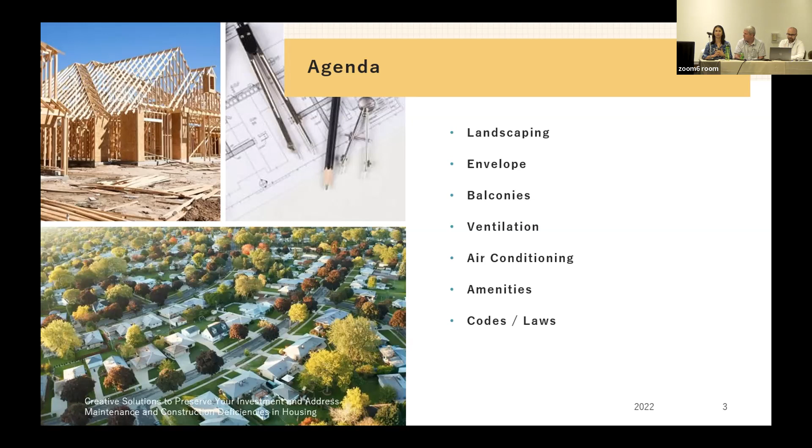As we move through these slides, I'd actually prefer for it to be more interactive. So the first slide will be some images, and then if there's anybody in the room that has an idea of what we're trying to communicate—a possible deficiency or something that needs to be corrected—we'll discuss it.

Before we dig into that, I'd like to get a sense of who is in the room. By a raise of hands, if there's anybody managing properties or development, we have a few of those. Are there any other architects in the room? Got a few. Anyone with a construction or maintenance background? Great. Anybody that wants to say who they are that I didn't mention? Okay, all right, so let's dig in.

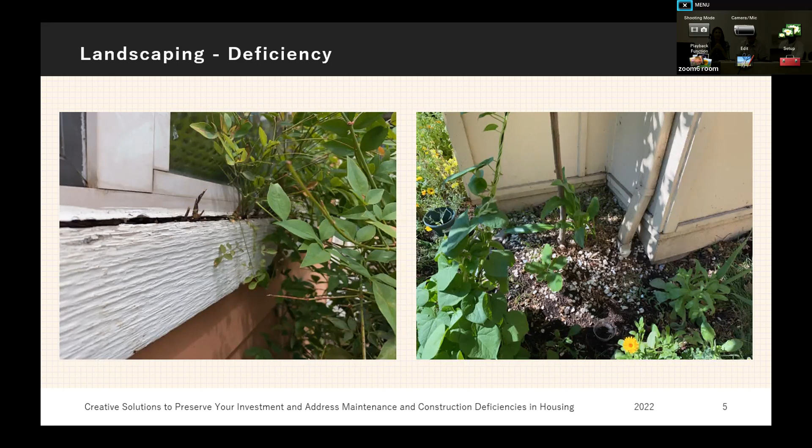Then the image on the right side—this is pretty common, and I feel like even some of us are probably guilty of this at our homes—where over time you want to replenish your topsoil or bark dust, so you're adding it layer by layer. There's some wood trim down there and the dirt is piled up against it. As we all know, we want to create a separation—6 to 8 inches is where you actually want to be. So there's moisture that can wick up into that siding and start to create dry rot. But the other thing is you're also providing a pathway for bugs, wood destroying organisms.

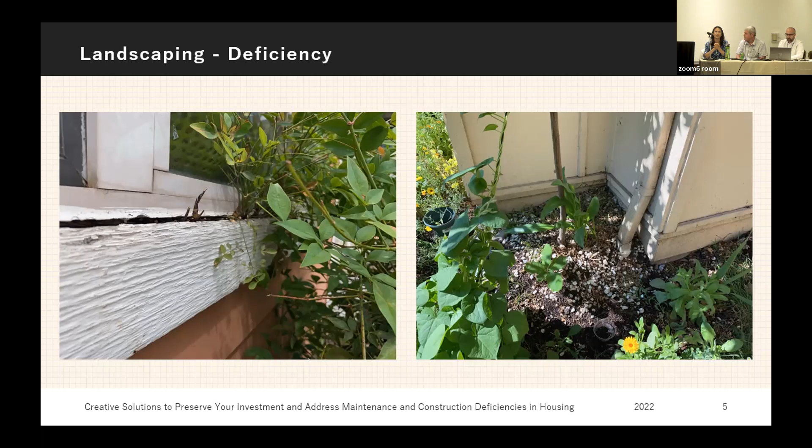So if we go to the next slide, some ideas: your baseline is to pick plants that are not going to be vine-like, keep them 3 feet away from the building, create a large separation, know what they're going to get to when they're full size, and maybe lean towards something more like wild grasses or things that stay a little more compact. So those are some of the design side—the most cost effective, just creating that separation and being mindful about what you're planting in the first place.

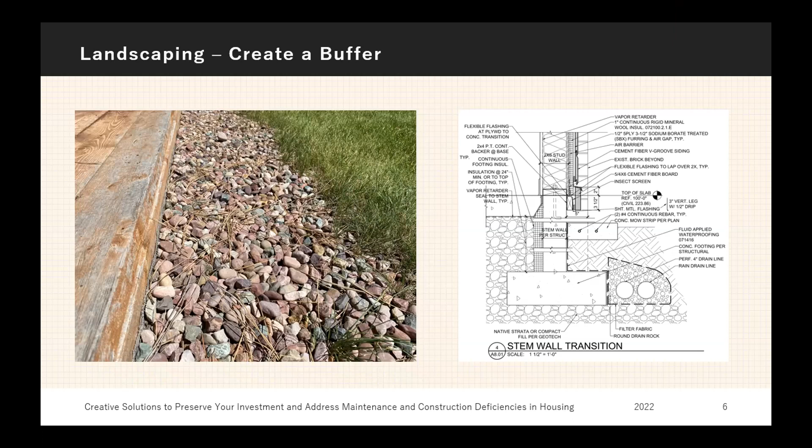However, if you want to take it a step further, some things I've seen is actually using rocks as a border. You can pick ones that drain well, so it'll also help moisture get down if you have a footing drain—that can help get moisture away from your foundations. I know some people might be concerned with the throwing of rocks or giving people the ability to do that, so maybe err on something smaller scale.

Another thing is the drawing on the right. I don't know if everyone's familiar with architectural drawings, but this is a section detail through the foundation. On this project, on the right side there's a concrete mow strip, about 12 inches wide. In areas where you might be right adjacent to lawn, and sometimes we'll see in high traffic areas the siding at the bottom getting damaged just from a lawnmower, you can create a physical separation—a physical barrier that sets the landscaping off of the building.

So that's going to cost a little bit more money on the front end, but if you're not having to follow up and constantly replace trim over time, I think you're going to capture those savings. And again, if you can't do it around the whole structure because of funding, maybe you just put it in the areas where it's going to be the most helpful and prevent damage.

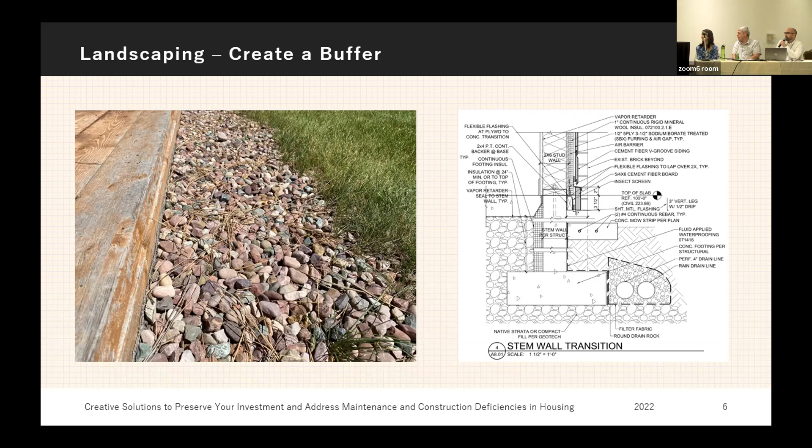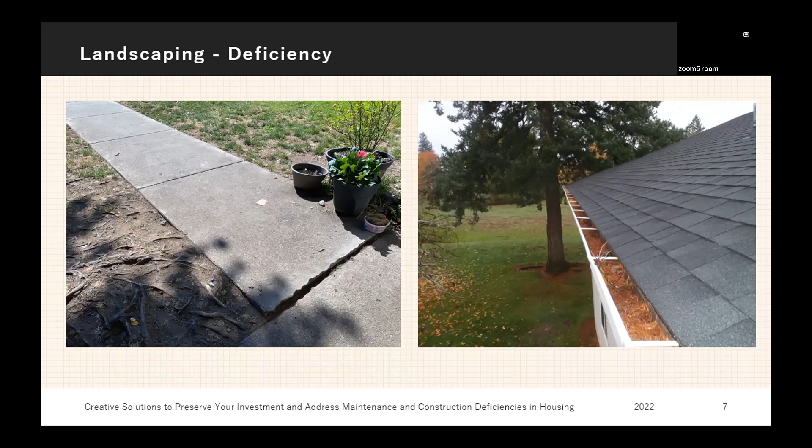What do you see in the right-hand photo? Go for it, somebody. Yeah, so oftentimes you may put an evergreen in and you think, well, that's not going to drop its leaves. Well, they drop their needles and they blow.

So the solutions here that we like to see is proximity. Trees grow, they get bigger, right? Keeping it away from hardscapes. People are typically pretty good about thinking about hardscapes, sidewalks, and keeping the trees away, but oftentimes the structures themselves get forgotten about. Where's the predominant wind coming from? Keeping it away from the buildings. Maintenance is always one of those things you try to strive for, that zero maintenance building, and that doesn't exist.

So the other thing we can also implement is root barriers, and we recommend you do that always. If you're ever near a hardscape or structures, get root barriers in. That forces the roots down as opposed to out. It actually makes it for a healthier tree anyway too. It's going to be more drought resistant, but it's going to keep those roots from going over to the sidewalk panels.

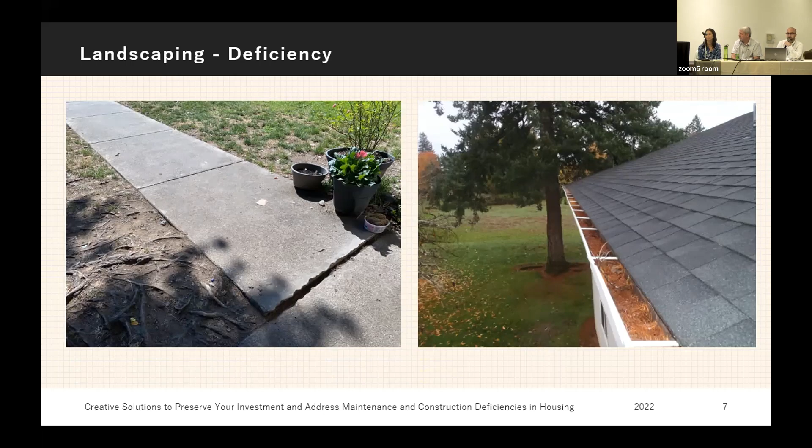Once you start to have those sidewalk panels be impacted, there's really not much you can do. You're going to get an arborist out, you're going to cut some roots if they allow you to. You're going to be now into jurisdictional issues, as trees are very sensitive in our region. And so it's going to be something that is going to be an ongoing maintenance issue.

So the best defense is to really be thoughtful about where you place that tree and be implementing root barriers when you originally plant those trees.

Maintain the water. The roots go to the water. If you're watering the other side of it, the roots will follow it. They do have better irrigation systems now that will integrate water down to the bottom of the root ball, which is something that's really nice that they've been putting into projects now.

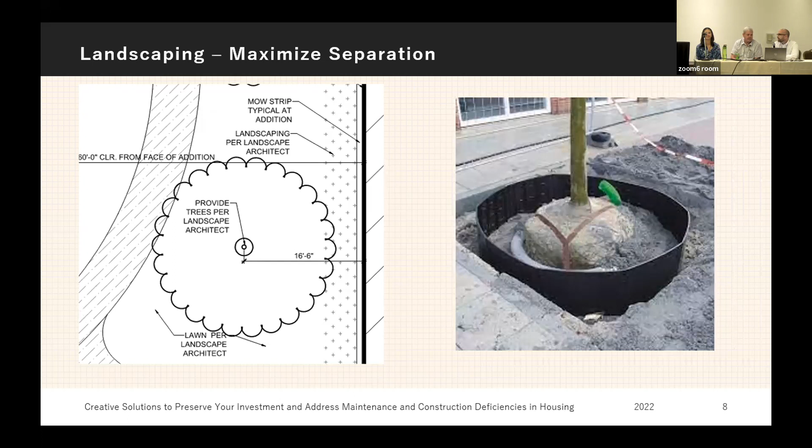Envelopes. All right, this one's probably on the trickier side to identify what I'm after. Does anybody have any ideas? Okay, oh yeah. So this one could have improved ventilation. Yeah, that's a good thought.

It might be as well.

It's especially noticeable if you see a single story structure that has big eaves, and the windows end up tucked up high under it. So you're really minimizing the chance, because openings are where we see a lot of the water intrusion and where moisture is actually getting into the sheathing and damaging behind the siding.

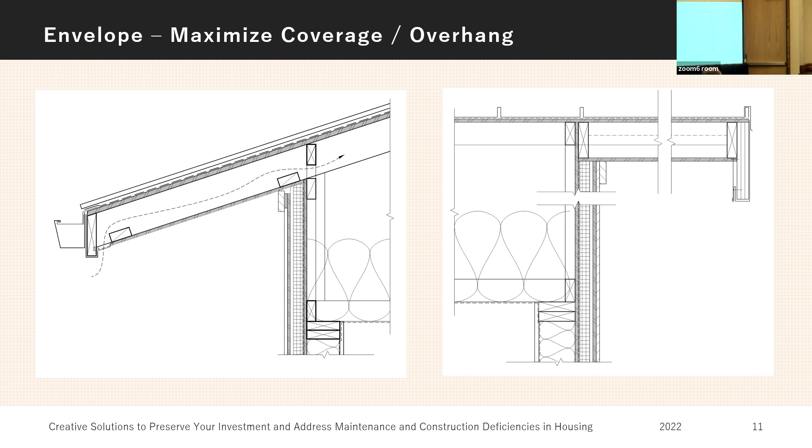I also want to comment that if you have a building without an eave, your envelope is in a significantly different environment than one that has an eave. Just a 4-inch eave builds a pressure zone against your siding when the wind blows, so that the rain doesn't push on it and flow in very weird ways. So eaves are really important, even if they're just small.

Indeed. So we gave you a hard one, or obscure. I think everybody in the room would be able to tell what we don't like here. Anybody? Yes.

Pesky comms contractors. You get done building a beautiful building, you VE'd out coax to the units, you VE'd all that stuff out, and guess what? People need entertainment, they need TV, and they start posting satellite dishes all over your building, and many different comms come in. We don't like penetrations, right? We work hard on window penetrations and door penetrations and all types of penetrations, and then somebody comes in and puts hundreds of small penetrations and says, 'Don't worry, I put silicone on it.'

Well, that creates issues, and water will find a way in. What we often try to recommend is, one, don't allow satellites. But if you do, get them posted off the building. Don't penetrate your envelope, that is your first line of defense. You don't want to be penetrating your envelope. There's also specialty pieces that can be used on your roof that integrate into your roofing system to minimize that. But if there's anybody in the room from a maintenance perspective, this is probably one of your biggest ires.

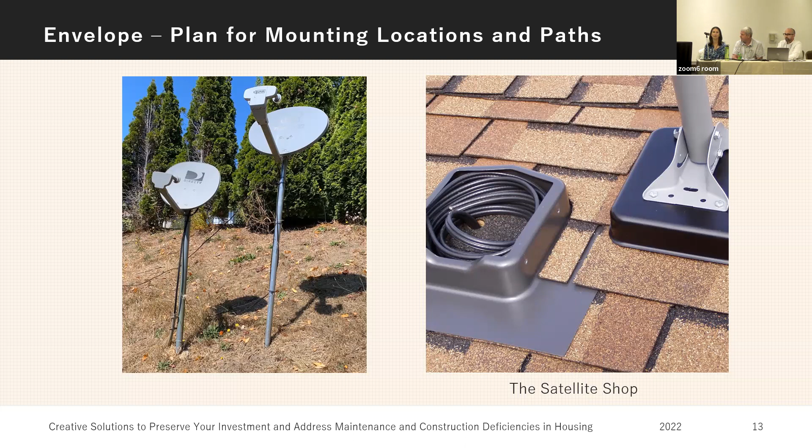So for this one, I think part of what's happening is that exterior envelope, the way we're building walls now, we're adding that air gap. On this facade, we figured out from looking below that there was a gap in the wall, and they assumed they could bolt straight through into something solid, some sheathing, but they just damaged the siding. The siding's warping. You can see that on the image to the right, and on the image to the left, there's a pretty big gap where the siding's coming through.

If you go to the next image, taking a section through, at a minimum you need to be installing some sort of blocking or backing. You also need to add additional protections above, so flashings that direct the water from your wall assembly out, and then some sort of siding or protection in front of the blocking.

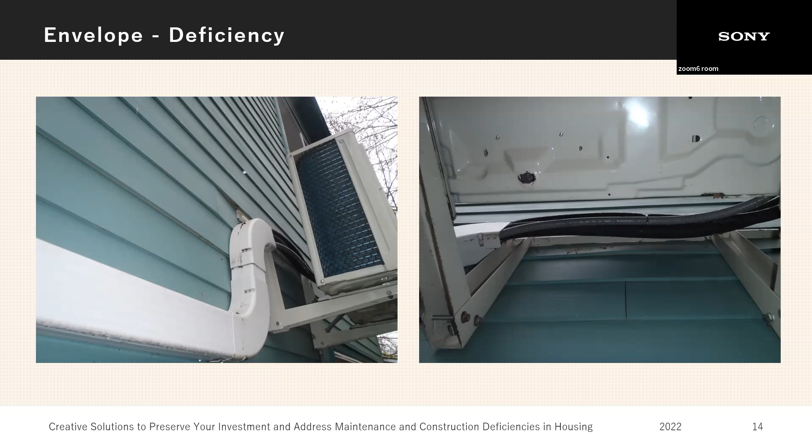So one of my recommendations is you might be getting funding for something like installing mini splits on your property. Sometimes a company comes in and you don't have a general contractor or an architect on board, and they're like, yeah, we can do it. What you really need to make sure you understand is how your building system, your envelope, works. It may cost a little more to get expert advice on the front end, but it's going to save you potentially in the long run from someone who wasn't aware of how the building was put together.

And on that particular property, different elevations had been replaced over time, so it wasn't consistent on every building. Some of the buildings were actually better off. Having someone come in who understands how to keep moisture out and can help you through that process is what I would recommend.

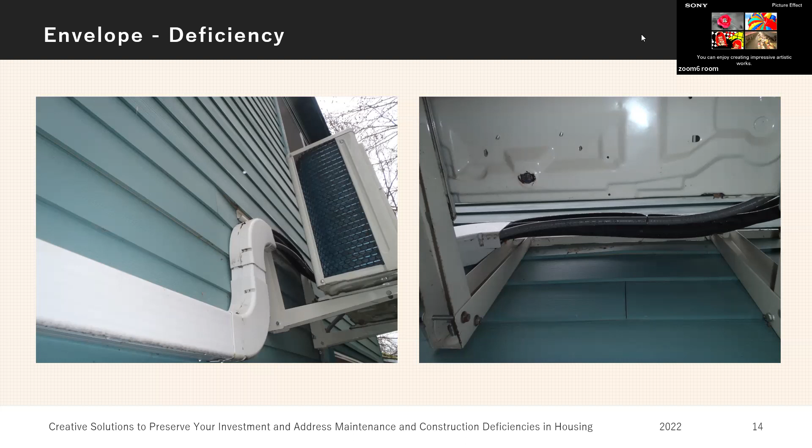I want to ask a question.

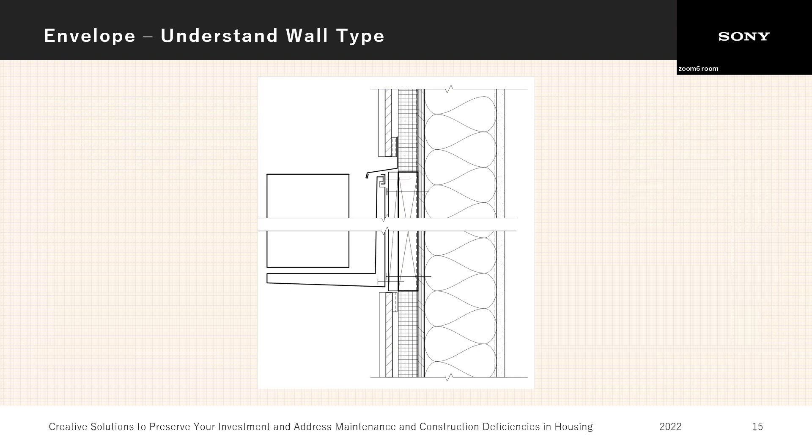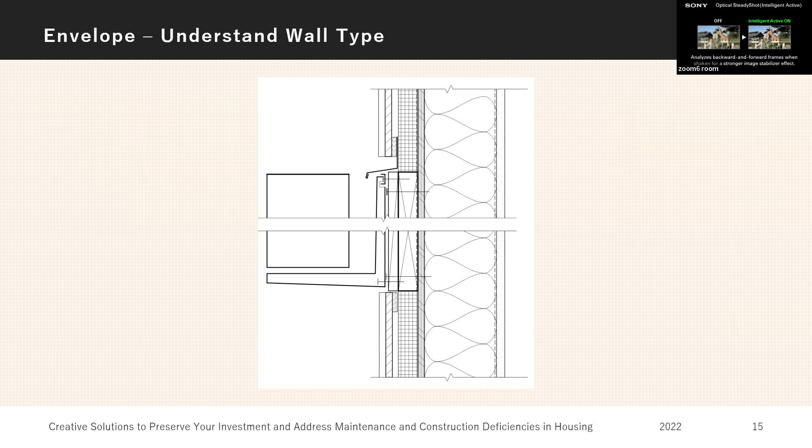I know in the past Oregon Housing has managed a lot of the energy funding, and there's been some issues with the local energy trust. That's probably what happened here - the county came in and added these systems for the tenants outside of Oregon Housing, and so it got disconnected from that. Who's really doing the energy money now? Is it coming from Oregon Housing?

Yeah, so it's still kind of an open game, and you guys are kind of fed to the wolves on whether the person is actually familiar with the housing side.

All right, so more deficiencies. Probably pretty easy judging off what we saw on the previous slides, but anybody have ideas here? Just more of the same - penetrations, right?

So you have things that seem simple and innocuous, like fire extinguisher cabinets. You're coming back, the project's over, or you get an inspection and they say, hey, we need to add some fire extinguishers, let's get this put in. But it's penetrations, and we don't like penetrations.

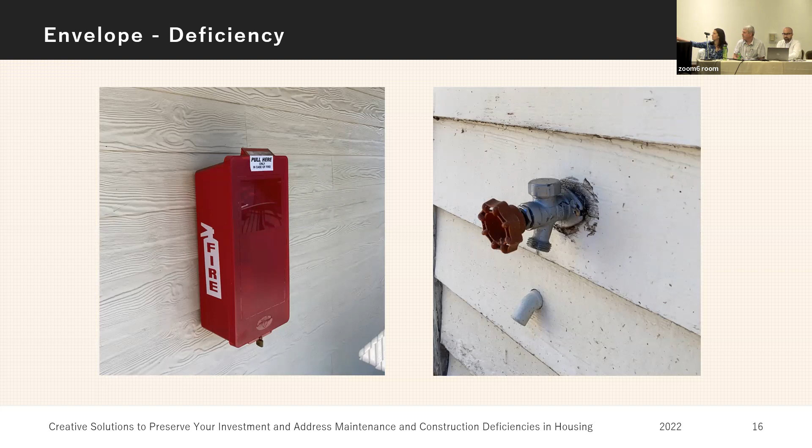And then, real quick, the image on the right is actually a hose bibb detail with more of the common envelope - now we're starting to put rigid insulation on the outside, so there's more thickness there. Being thoughtful about adding trim and flashings, making sure the moisture coming down the wall is getting moved to the outside, not just swapping out that hose bibb and relying on sealant.

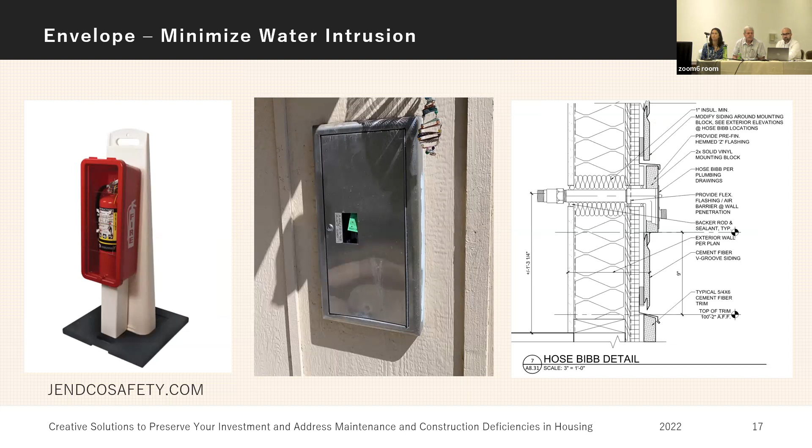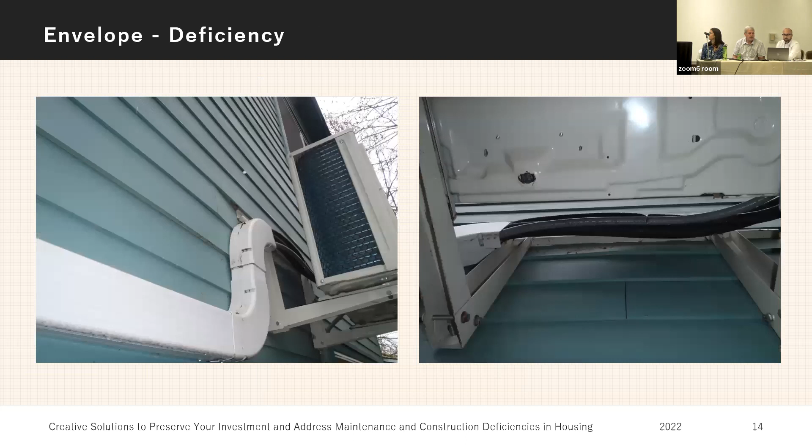This one? Piece of this one. All right, sorry.

Whether that's okay, or if there's any issues with doing it that way. As long as you're putting it together properly, it depends a little bit on the window system, but you're probably doing vinyl, and it probably has the nail flange.

Actually, this is a good point to bring up. A lot of times people will, in a rehab, just cut off that nail flange and then screw in through the jambs, which is a no-no, and will create moisture issues. But if you're able to remove the siding and put it in properly and have your flexible flashings and then your other flashings above, you don't necessarily have to wrap it in trim. You can still be successful.

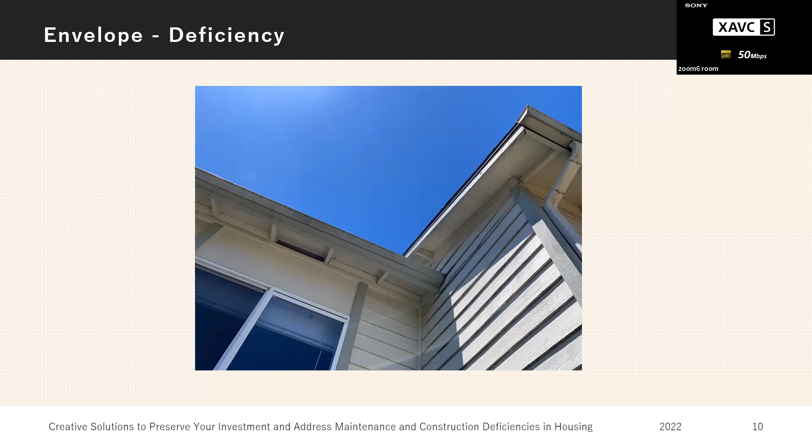Right. Yeah, no, that's a good point. And again, it's about where the water's coming from in the system above and making sure that your flashings are going back far enough that everything, it's like bird feathers, overlapping, and that the water's all getting pushed out. And so there's different ways you can put it together.

And I don't know if I'd say that necessarily having it on the outside or inside makes a huge difference, as long as you understand how the parts and pieces are going together and everything's directing the water out. Yeah, and I would say inset is great, but just the way that we build structures these days, you're going to be using that nail flange window. It's going to be on that face. It's just you're not going to have the opportunity to inset it.

Trim, as Jessica said, you don't have to have it. I would advocate for it. It gives you flexibility in the future. If you need to get into that window system, you're not getting into your siding panels now. You're pulling out your trim. You're able to get into that window, remove that system, put it back together rather easily, as opposed to getting into your siding and where does that go and how does that continue to play out.

So is it absolutely necessary? No. Would I advocate for it? Yes. I think it gives you flexibility in the future, and it is going to perform a little bit better over time. But it's definitely not necessary.

Good question. All right. This one, oh, wait. Yep. Thank you.

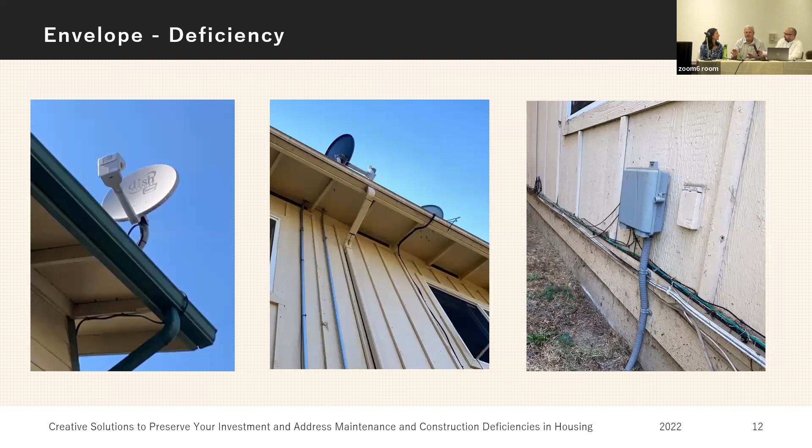And in doing syndicator audits, I'll tell you that if you go and fix those downspouts and do that, it can make a property really look a lot better. I visualize a property on the coast that finally broke down and changed out all their stuff to PVC. They thought it was going to be ugly. The board was very reluctant, but it straightened everything up and just made it look nice, and it was really helpful.

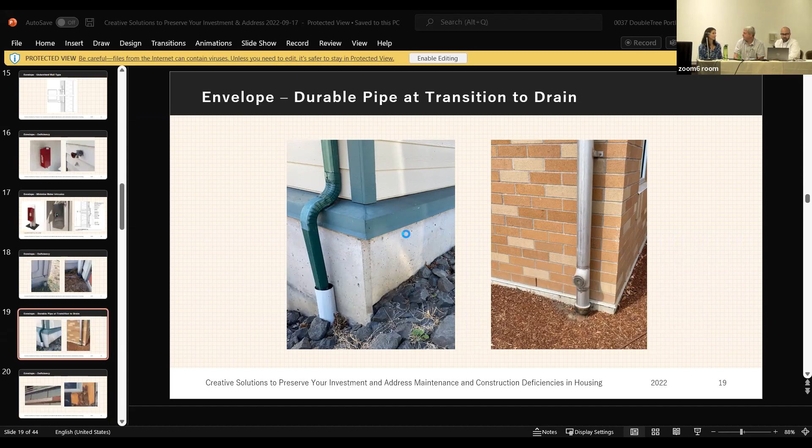Really, the one thing I want to drive home on these photos is destructive testing. Get in and figure out what you have. You should, if you're working with a contractor, set up allowances for what that is going to be on the project, because you can't know. You can't open up every single wall. But you need to really get in during the design and pre-construction and open up some stuff. Figure out how far spread it is. You can have a responsible allowance.

If you set up an allowance that's too small, that's really painful later. But if you set up it too large, it could really hurt the budget, and you don't get to invest in some stuff you may have wanted. So really, the due diligence here is what I want to strike home.

These guys are only able to do so much in their CNA, right? They're going to identify, hey, this looks like it's suspect. This looks like it's at the end of its life. They're not going to get into it and start tearing it open. That's when you really need to get somebody in there, a competent contractor, to get in there and look at those systems.

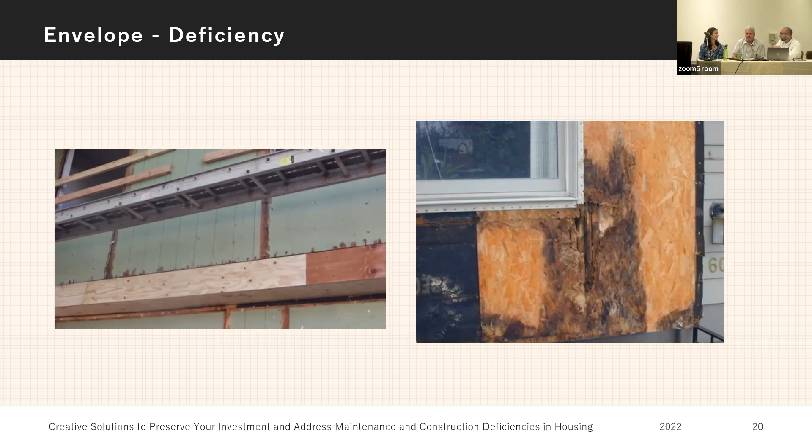And I will say, at some point, just replace it. I did a site where I think there was pushing 1,500 holes that they had drilled to test the T111 siding. It probably would have been cheaper to not pay an engineer to drill all those holes and just reside it. But that's challenging in the world that we live in now, because it's all about knowing it and getting the budgets down and not having that flexibility to say, I'm going to go hit it with a hammer and I'll replace until I can't break any more substrate, and then we'll be good, right?

Everything in moderation, right? That's the word. And so here's what you need to do. It seems like common sense, but going back with your proper WRB, going back with a good barrier that's going to have proper lapping. It's going to drive that water away from the building. That cladding is just that. It's a front line of defense. You really need a strong WRB behind that to protect your buildings.

Do you want to explain what a WRB is? Yeah, for those who might be listening, it's a water resistive barrier. It's taking your moisture away from your building. And then of course a strong, yes sir. I'll let you finish. I actually have a question before we move on. Sure. And then going back with a good long-term cladding system.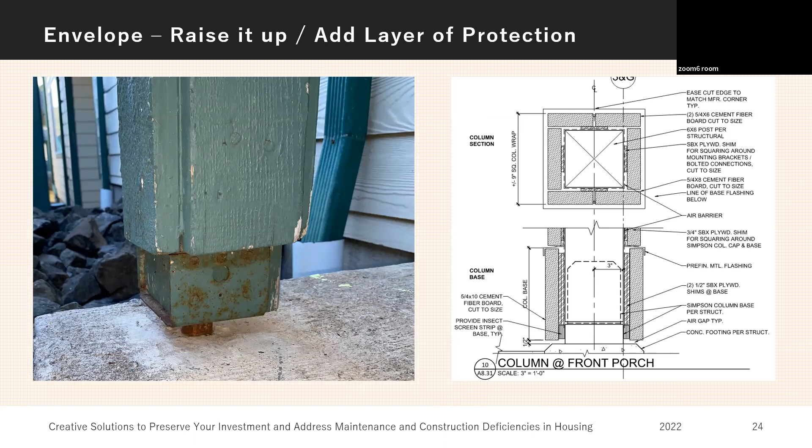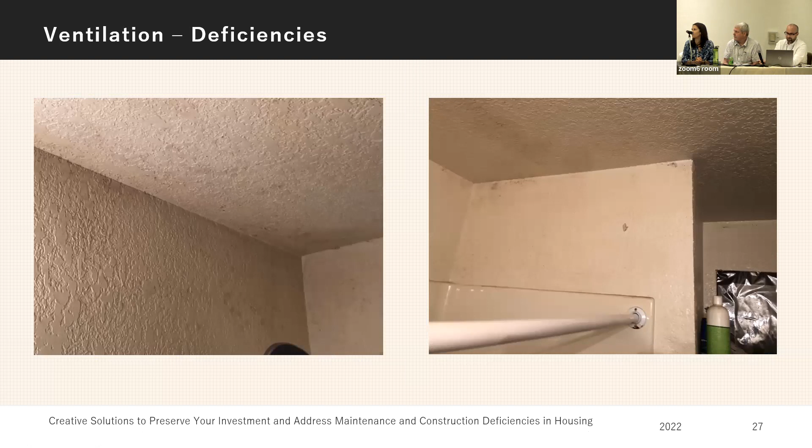So if you go to the next slide, one of my biggest things that I like to advocate for is replacing your exhaust fans if they're not removing enough moisture from day one, because they're undersized for design. Have a mechanical engineer go in and look and see what they should be upgraded to, or if there's a different way to pull it out through the roof.

Also, not relying on systems that depend on the operators or users of the space to turn them on, but being tied to a light switch or an occupancy sensor. I think property managers should have an ongoing plan of replacing these a little bit at a time every year, because if you can just not allow the excess moisture in the first place, then you're going to resolve a lot of the problems that tend to become more robust - and you may not even know they're occurring if it's not being reported.

I personally had this experience as a user in my younger years - I'm an architecture student and my exhaust fan's not working, and I'm like, I'm gonna keep using it even though it's really loud and it was annoying the other tenants in the building, and my landlord kept coming and gluing it back together, and I'm like, you guys, this thing is not working, we need a new one. And I single-handedly got the whole complex to get new exhaust fans.

Yeah, there's a question.

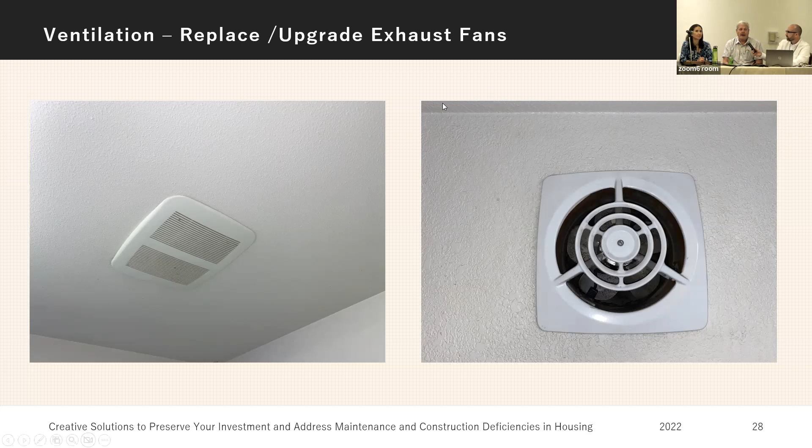You're absolutely right, and I've talked to a lot of maintenance guys about it. In the early days we had timers and different things. You may even need to adjust that flow rate with every move-in, based on the number of people in that unit, and various other factors. You've got to do it right to keep that energy cost down, and there's a significant health improvement in that picture too for the tenant, to get that air moving. We've all seen those units where you can't imagine how they live.

Trickle vents, or what are you talking about? Yeah, I'm glad you brought that up. So...

If a property has had window failures and they've only replaced a couple here or there, we've noticed they don't maintain those vents, and that starts to impact the units - we start to see more moisture in them. So if you're doing repairs for a broken window, make sure you understand that some of them have this vent, and it's part of a greater system. If you're not making changes to how air gets into that unit, you need to maintain those vents, or else make a more holistic change to the unit, so we're still getting that airflow.

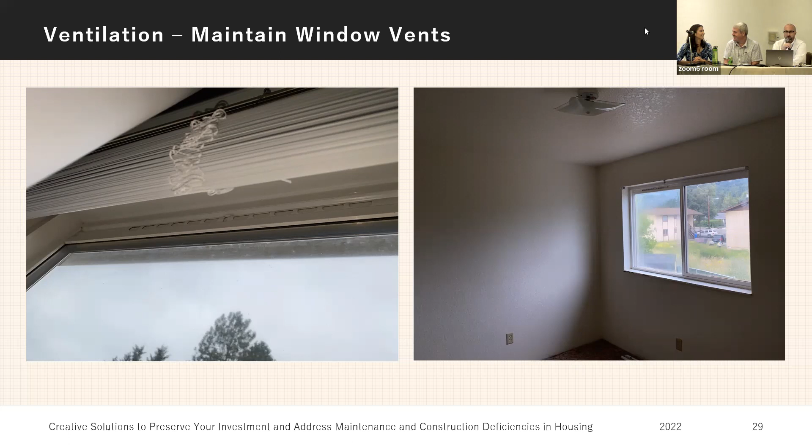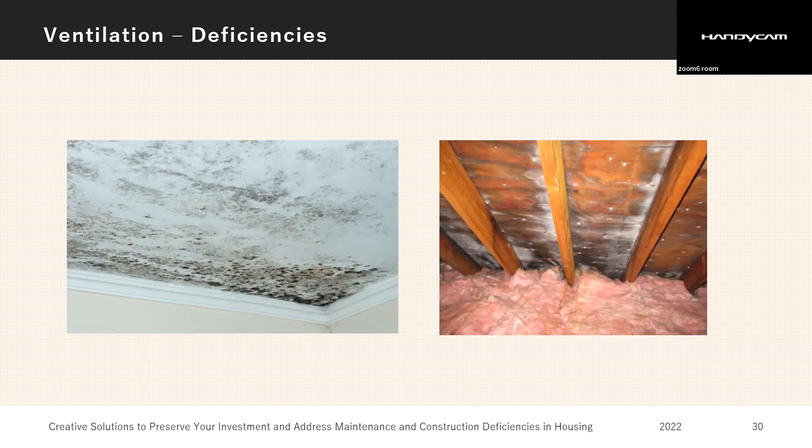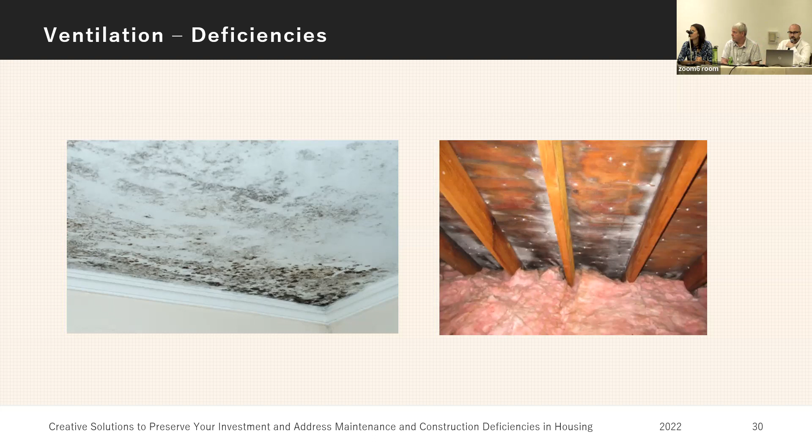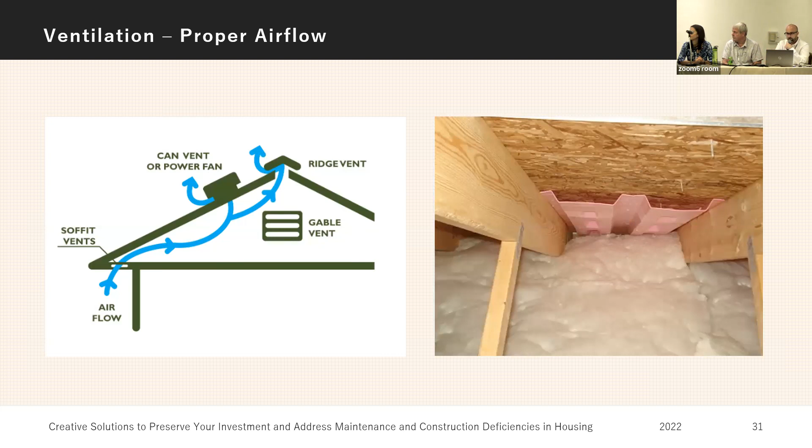As we talked about how to properly vent, you often see where people will just take the vent and toss it up into a can, or even worse, you'll see it where it just dies into the attic space as described before. So really making sure those connections are done properly. You don't want to just take that moist air and dump it into your attic where it's going to sit there forever. So really, this comes down to having it properly designed, but then also properly integrated into the system, making sure that you're checking to make sure that's done well. Have quality contractors in place doing these systems.

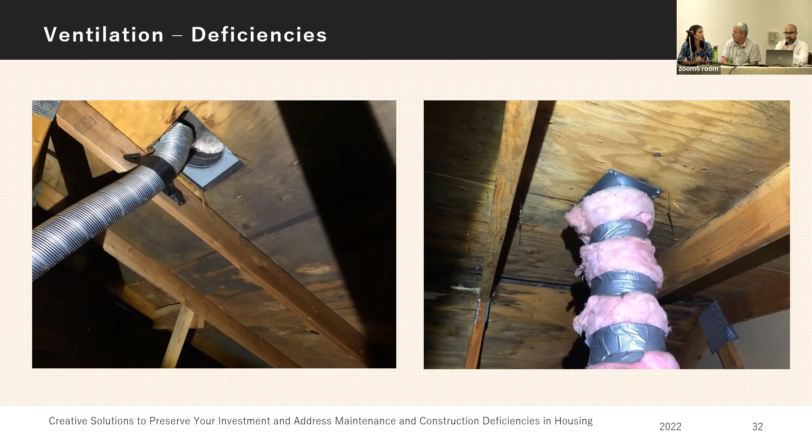Mechanically fastened through the roof system. Nothing else.

All right, air conditioning, consider cooling. So we see a lot of the through window AC units. I guess, do you guys have any ideas of what I don't like about these? There's a couple different things that I have concerns about.

Another thing that's come up recently is when these are located in a bedroom, your window is supposed to be your second point of egress. So people trying to get out when you have something fixed in there is a concern.

So what are some alternatives, as here in the Pacific Northwest things start to see hotter temperatures, especially in the southern properties. I'll see these almost throughout the entire complex.

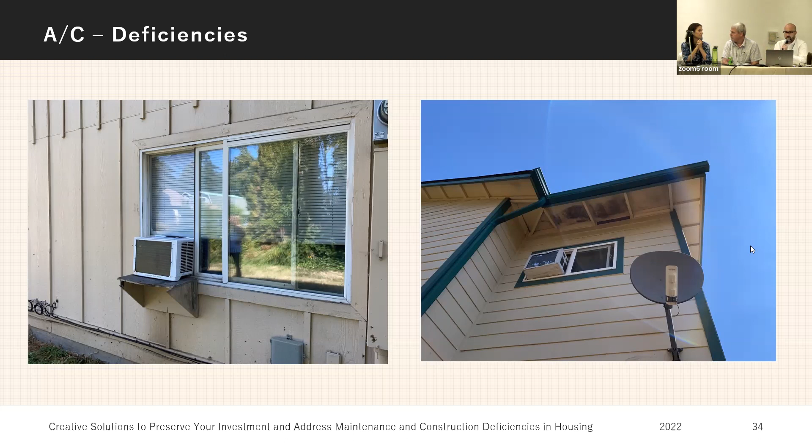Well, we worked with QED, our envelope consultant, and our window manufacturer to figure out a way to actually integrate a PTAC into the window system. A lot of brain damage, a lot of long nights scratching our head, a lot of thinking with our owner's rep on ways to do it and not get calls back in the future. But I would say, ingenuity.

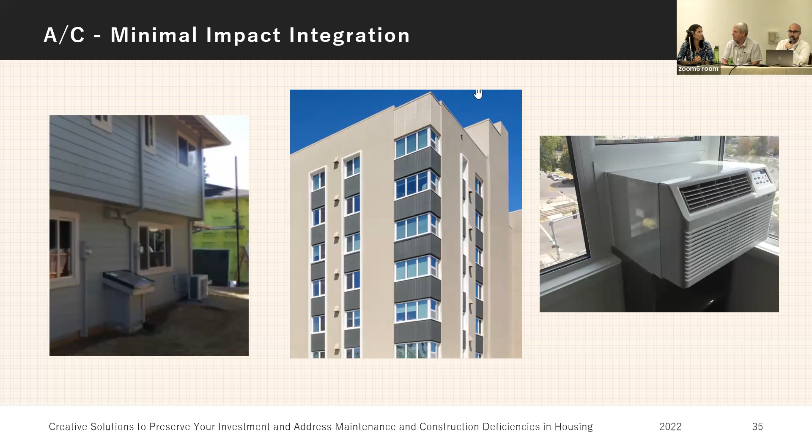Things can look hard, but cooling really, really makes the space better for the end user. And as we talk about ventilation and moisture, they also remove moisture, so they're very beneficial to the space. So the main thing here is just always be thinking of ways to get it done, not reasons you can't get it done.

The other thing that I came across is Energy Trust of Oregon has a program where you can create a cooling space that's more of a community location. So at least having one spot on your property where people could go if they need access to cooling.

I would encourage people to look for other funding sources and incentives through Energy Trust of Oregon. I believe Ellen Shepard is here as well, so you could try to connect with her at some point in the next couple days. I'm not as robust on all the details of those items, but I know they're out there, so just wanted to highlight that as something for people to look into.

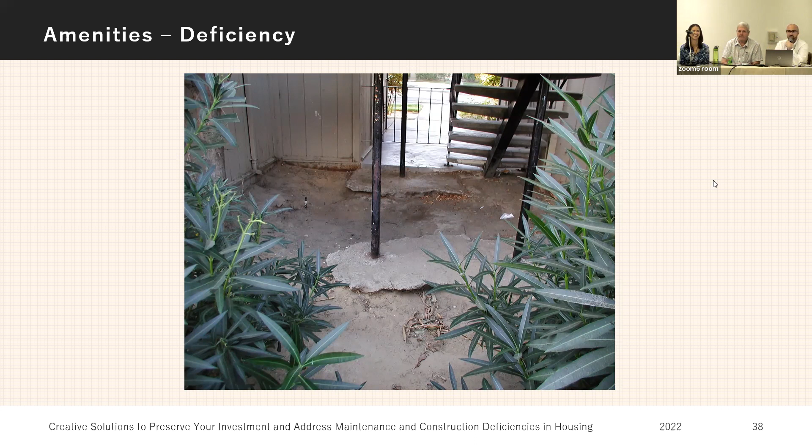I would also go back to the comments early on, the first slides we did on landscaping. We talked about the hesitation every time we talk about putting rocks around buildings and borders. I always get the comment of kids throwing rocks, but this goes a long way to keeping kids from throwing rocks. Keep them busy, keep them where you want them, not finding entertainment themselves. The kids get bored and they find entertainment.

For the older kids, I also see a lot of temporary basketball hoops. So if there's an opportunity to provide a permanent basketball hoop, I think that would go a long way for the older kids, in addition to the playground for more of the younger ones.

That is a good point. I do know that as the play structure gets higher, there are certain triggers for how much thickness you need for the padding, and also the fall protection. So maybe if you have a more compact space, focus on things like rock climbing walls, some of the shorter ones you see at elementary schools, that maybe reduce what your fall surface area needs to be. But there are going to be some limiting factors on certain sites. Swings are probably not going to be the best option and don't show up very often anymore, so avoid those.

Do you have any tips on playground surface materials and maintenance? The Holy Grail. Any preferences or types that you recommend that last the longest and work the best? Do you have an opinion on that one?

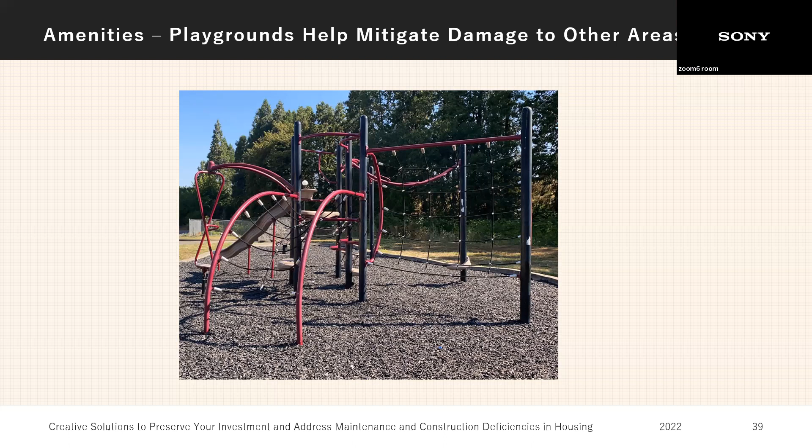Completely agree. With the rubber tiles, again, you can go to the points where you have the most wear. You saw the earlier engineered surfaces where they were poured in place and multi-layered. You get wear points, and then it's very expensive to replace the whole thing when you only have the wear points. People fill that in with chips or other things, and that exacerbates the situation. So the tiles give you that flexibility to replace as necessary.

The other thing is that they're going to be there over time, whereas with chips, we see a lot of times the kids move them around and you have low spots, so you don't have the actual thickness you're supposed to have. They're not getting replenished to as high as they need to be for one reason or another. So at least with those rubber tiles, it's going to be there — it's designed that way from day one.

They change how they connect over time, and if you don't have the same brand or same kind, then — think carpet tile. The comment was about extra stock. Absolutely, just like when you get carpet tiles, you get extra stock because of course this line is never going to be discontinued, and two years later you go to get it and they tell you it's been discontinued. Attic stock, attic stock, attic stock. Yes, it was also mentioned that their tiles have lasted 30 years, so they are a durable system. Those were good tiles — probably can't get them now.

All right, so we're not really going to get into the nitty gritty of the codes and laws, but I just wanted to highlight following the correct standard. So if you want to go to the next slide, anybody have any ideas on this one?

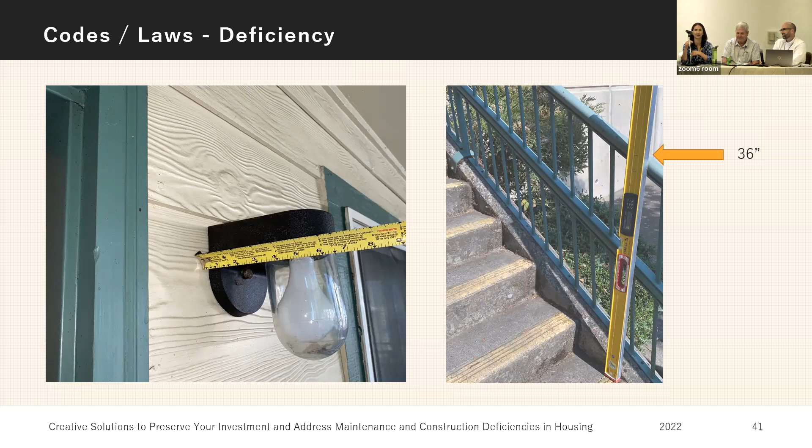The other one is stairs. So if you go to the next slide, there are codes for the state of Oregon that have certain requirements. For a stair railing height, you have a range. When you look at UFAS, it's very specific about where it wants that railing height to be. So the last thing we want to do is show up to a property and see one where they've just replaced everything, they're super excited about it, and then the railing height doesn't meet the UFAS standard that it's supposed to. So really make sure that you understand your funding source and which standards you're supposed to be following, because when we start having the federal codes impacted, then we got to be picking the one that's the most restrictive and just really trying to make sure that we're meeting all the standards.

So you might even want to just have a conversation with your architect and make sure that they understand if there's federal funding, because as architects, there's a lot of things that we're trying to manage and codes that are changing. And so yeah, I just wanted to highlight that. It's not good to be an award-winning property and not have your handrails right.

So we have made it to the end. I think we have just a few minutes left. If there's any final questions, I know people were good about asking questions throughout, so hopefully we've addressed most of them. But are there any others that kind of waited for the end?

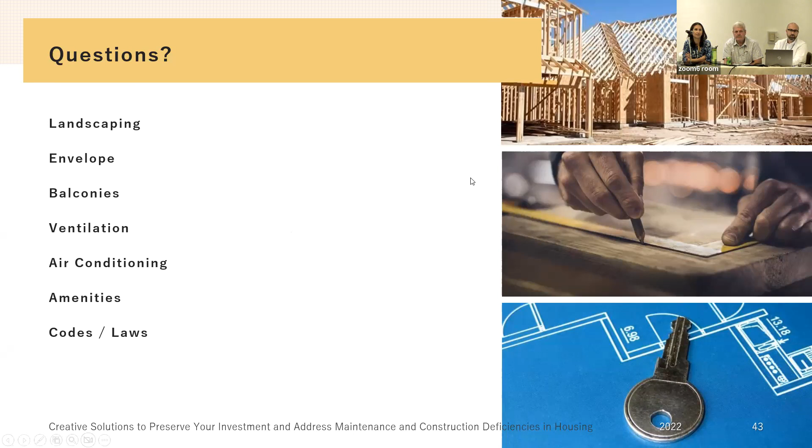Is there one that's the most strict? Typically when we're looking at projects, it's easier for us just to take the most difficult, complicated one, and make that the standard in doing all of our projects, and then make them kind of standard specs that way for every single project. So the question is, is there one code or law that's the most strict, and you could just use that one? Unfortunately, I don't think that across the board that exists, because one of the things is, like in a restroom, they have very specific locations of where they want the bars in UFAS, but then on the Oregon code, there's also a vertical bar that's been added.

Then for stairs, it's strict in that they want the railing height at 34 inches, but in the Oregon code, you have a range. So I don't think that there's just one solution that fits all. And I have talked to rural development architects, and it sounds like UFAS is still here to stay for a while. So it's just something we need to be mindful of.

And probably what you kind of need to understand a little bit is that UFAS is really doing the housing side of stuff, where the Architectural Barriers Act is doing the public courthouses and that sort of stuff. And so there's some give and take in each of those that kind of reflects that. UFAS has some stuff in it for the housing side that's different, and it doesn't have the commercial space stuff that well. And so that's why I think they've been talking for a lot of years about trying to change and not use UFAS anymore and whatnot. And it generally, the discussion boils around to, but it's got this for multifamily and that, and it's helpful. And so that's kind of why I think it's going to stay.